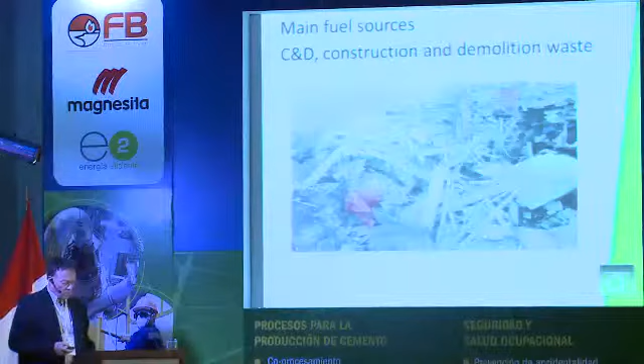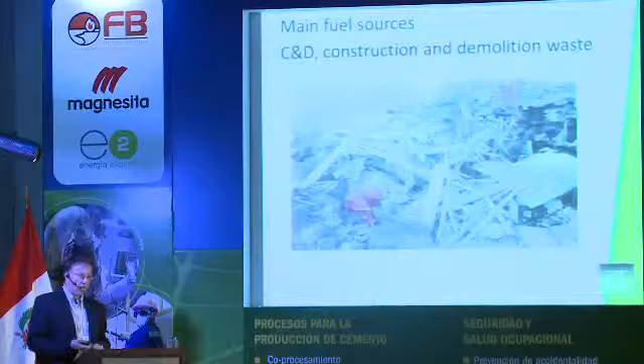The presentation itself: what waste streams are available? One of the major waste streams, at least in North America, is construction and demolition waste. It is mostly directly from the construction sites, not sorted. It contains wood, shingles, concrete. It is very abrasive, has a large variety in density, and at the end, it has little BTU value because the content in wood is extremely high, and wood has, compared to other alternative fuels, a low BTU value.

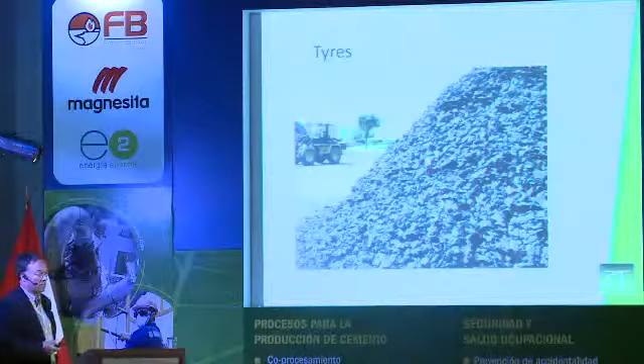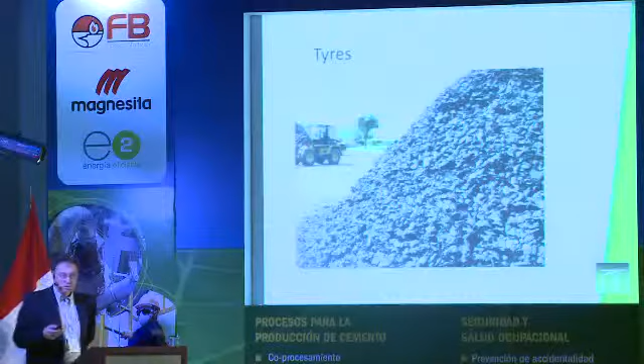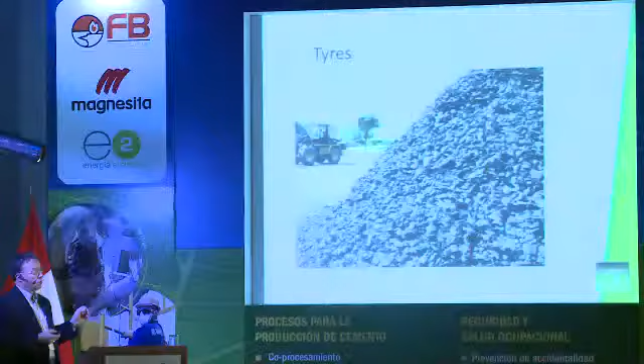Another very popular fuel is tires. Tires, in this case, are chipped. The chipping of tires is a costly process, and there seems to be a tendency in the cement industry to use tires whole, to avoid the process of shredding. Tires are extremely abrasive to shred, so good for manufacturers like us—we can sell big machines and a lot of spare parts—but for you, as the users of this fuel, you're only interested in the calorific value, and the shredding does not really add to that. So tires are expensive to process. Also, tires are limited. Every country has a certain number of tires per inhabitant, and those numbers are very stable, so you cannot assume that tire consumption goes up.

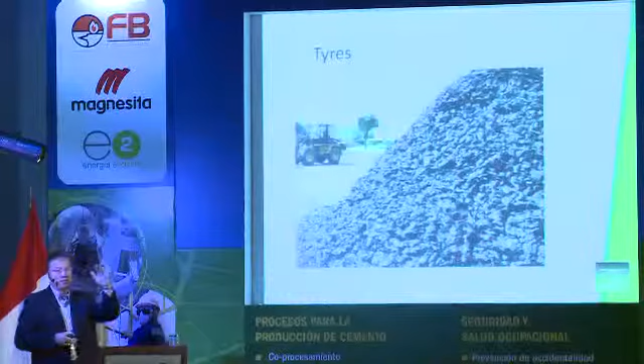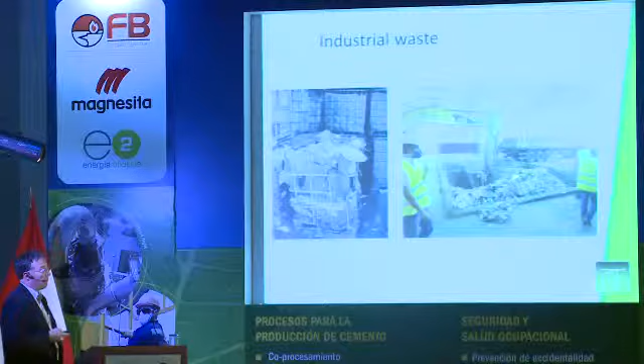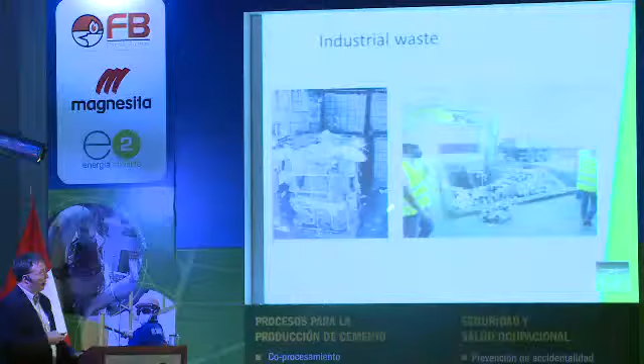But industrial waste is limited. It is a beautiful fuel, but I call it the icing on the cake. You have to remember that every big industry, every big car manufacturer, every big carpet manufacturer, every paper manufacturer, they are producing a product, not producing waste. So their focus will be to minimize the waste. It is very difficult for a cement plant to start a project on alternative fuels based on industrial waste only. If you're really able to find one supplier that can give you 30 or 40,000 tons of industrial waste a year, you're in a very, very lucky spot.

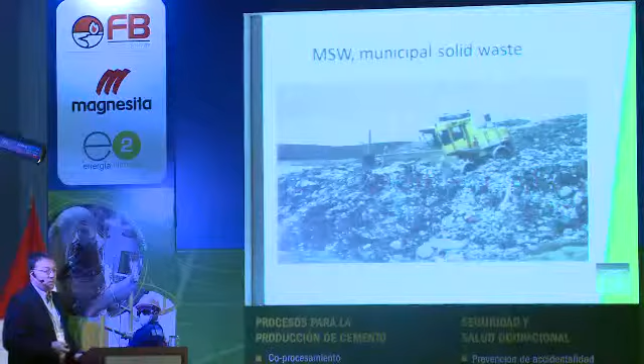So you all know what the next slide is. I present the winner: the winner is municipal solid waste. Why? Because it is unlimited and it is everywhere.

Municipal solid waste is a problem for a lot of communities, as they do have an existing waste collection system, but they only have one landfill, or very large cities like Lima, maybe two or three landfills. But those landfills have a certain expectancy for the lifespan. Once you fill up your landfill, it is extremely difficult to find a new location and a new permit for another one. So the municipalities or the private owners of landfills become more and more aware that their business model is looking at a certain end. It's a cul-de-sac that may be 10, 15, or 20 years, but you pretty much know if I continue to put so many tons into this hole, in so many years I'm going to be full—that's the end of that landfill. Mexico City, for example, is starting to go into mining into landfills because of this problem.

So municipal waste is, in our opinion, a huge resource. In many cases, the waste that goes into the landfill, even after the valuables like metals or special plastics have been taken out manually or automatically, 20%, 25% of the material going into the landfill is good fuel for the cement industry.

Now, we have been talking about waste, but waste is not what you want. You want fuel. So how do we get from waste to fuel, and what's the difference between fuel and waste? Waste is basically all material stream coming in.

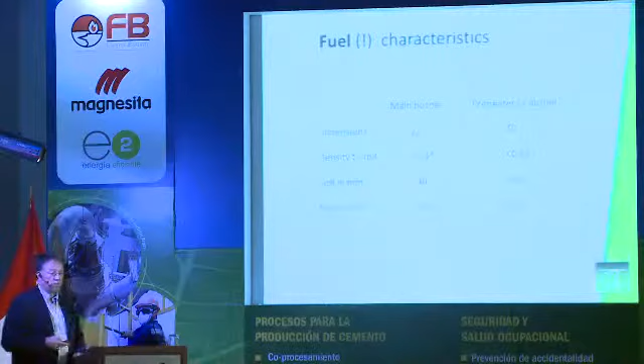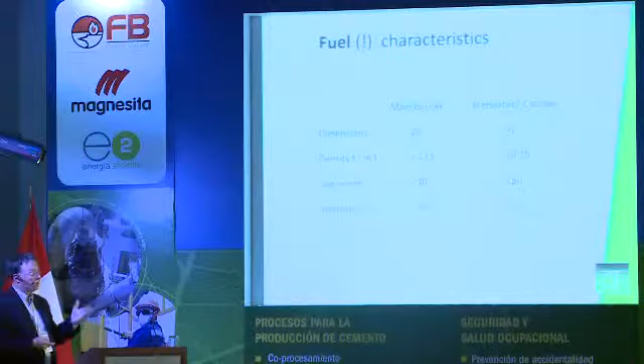For the fuel, we have 2 main classes, and this is not final, this is like an orientation. In general, you have the main burner fuel, sometimes called a king class fuel, where you have 2-dimensional material, very low density, a size limitation, and moisture content, I'm saying 20%, if it's lower, it's better. For the preheater and calciner, the scenario is a little different. You have 3-dimensional material, for example biomass would fall into this. You have much more tolerance on the density, and, very important, your sizing can be, depending on your retention time in the calciner or preheater tower, 80 millimeters or more if you have light material.

Moisture content, again here, this is a general number. In general, the drier the better. The problem is, very often you cannot get dry material. So the problem here is not the water itself, the problem is that the water replaces cement capacity.

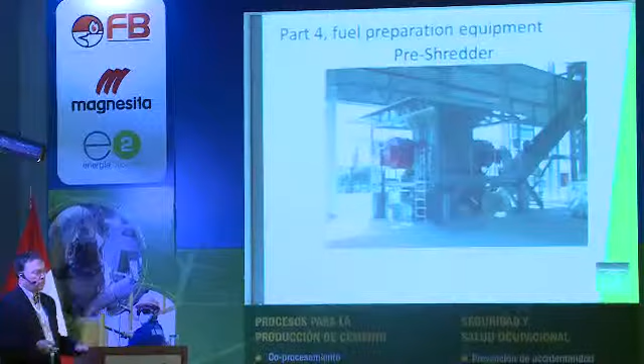First step, since the material comes in various forms, we have a pre-shredder. The pre-shredder is a very, very rough machine which has a configuration basically to take any size material and bring it down to 300 or below 300 millimeters. This is all this machine does, just to enable a more homogeneous flow into the production.

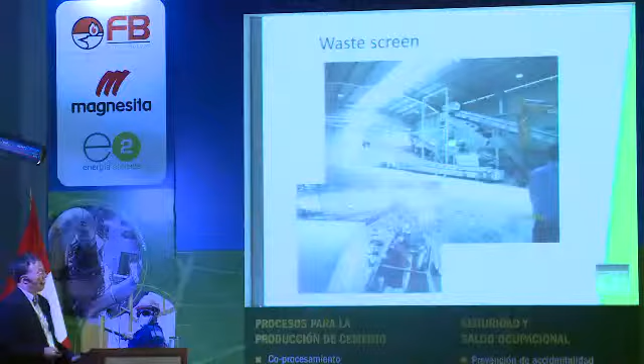Next point is specifically for municipal waste. Here we have a waste screen. At this point, we are separating the organic and small inerts from all the other waste. If you do not have organics in your material flow, you can use mechanical separation. Usually you have this one first, then you may have an optional manual picking to get out the valuables. But if you have organics in your stream, you need to take those out because that is definitely something you don't want in your fuel.

It is important to consider this because if you look at a pie chart from typical municipal waste, about 50% are organics. So if you look at a huge production line, let's say 60 tons an hour, you will look at 30 tons an hour of organics. So you have to deal with that.

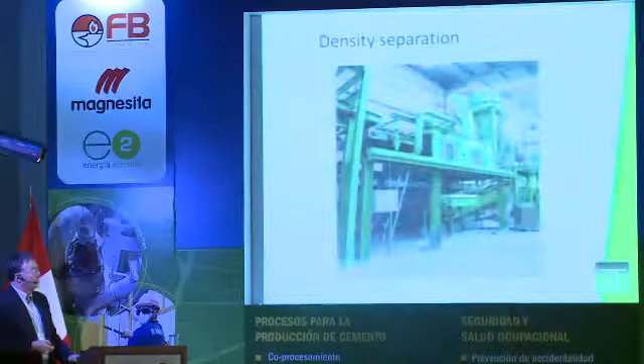The second point would be a density separation. You remember a couple slides back, we talked about the density. The screening and the picking usually only goes for large pieces. But what do you do if you have a small piece of shoe or a small cap of a pencil in your fuel? Or you have a stainless steel piece from a modern Hewlett-Packard or other printer? All of that is in your waste stream. This we're taking out with a density separation, which is basically a complex form of an air knife.

You will generate two streams. One is the heavy parts, for example everything that is more heavy than 0.25, if you're looking at the back end of your production, or everything heavier than 0.15 if you look for main burner fuel. And the light fraction, the remaining plastics, textiles, paper, cardboard, all of this material goes into the fuel stream, and this is fuel quality material.

But we have another criteria. We not only have the density, we also have the size to guarantee a good combustion process.

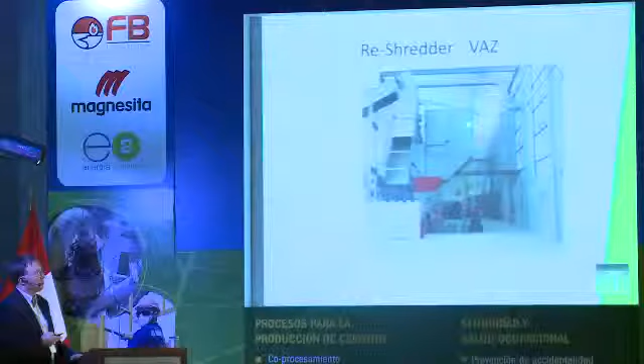So we have a second shredding step. For this machine, you can have various options depending on the size of the project and the throughput you need by hour. In this case, we have a machine with a hopper, which can take material here from the production, but which also has the opportunity to take clean material, which you may buy in very small quantities. For example, if you have a paper factory close by, you may be able to buy 5 or 10 tons a day of clean paper waste, which comes already in bales. So you don't have to pre-shred it, you don't have to screen it, you don't have to use density separation because you know what's in that bale.

So those bales you could introduce into this reshredder at this point, bypassing all the other equipment.

This machine runs on a mechanical base. It's a slow rotating rotor. You have a pusher that forces the material into the stream.

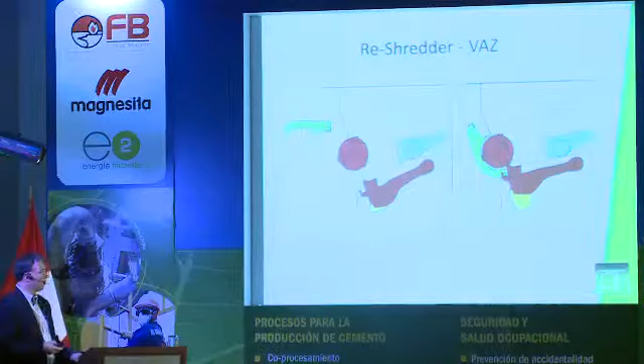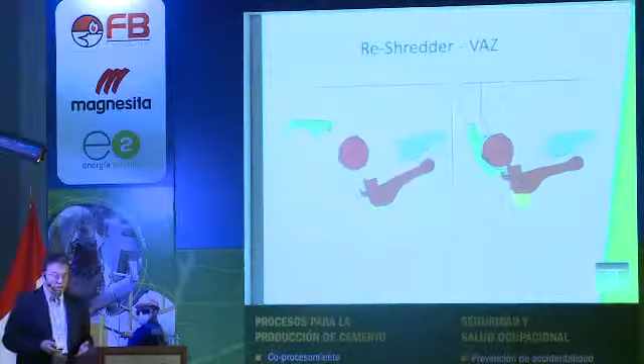And since we're talking waste, we have an air spring counter knife, because with waste, the question is not if you will have a crash, only when you will have a crash. You can have as many density separations and ferrous separations upstream, something will pass through. And if it's only your own mechanic who leaves one of his big Allen wrenches on the belt, when you start it, it will hit your machine.

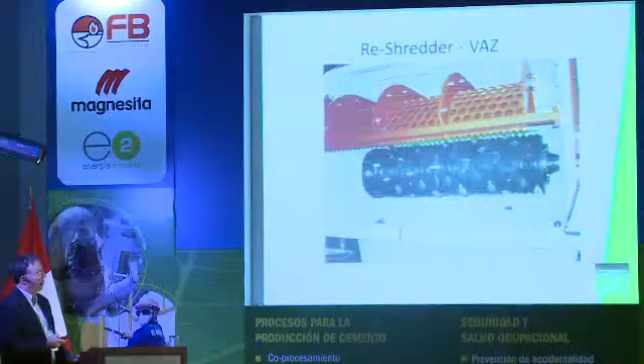So this is why these machines are designed to have relatively small particle size. This is where we define 50 millimeters, 80 millimeters, or 30, 25 millimeters, depending on your process requirements.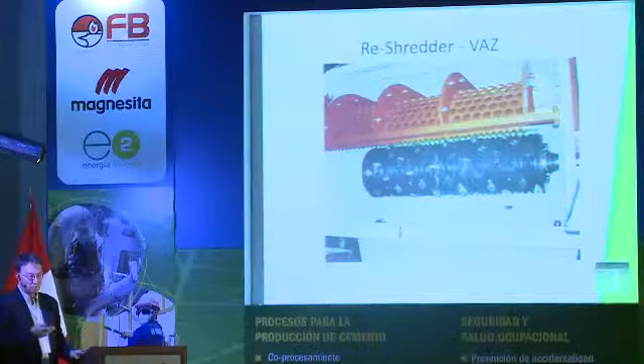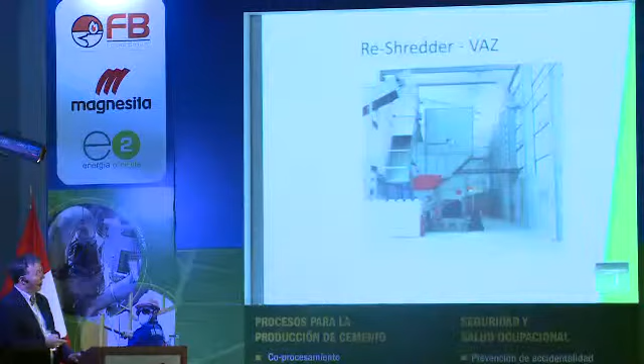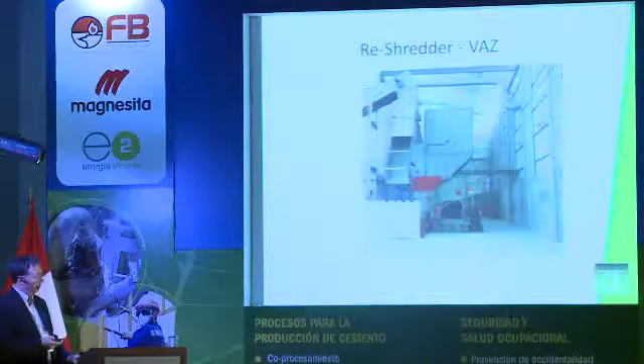You can see the counter knife here is accessible because if you imagine running this at, let's say, 10 tons an hour, you have a lot of material in here. When the machine stops because you have a crash, you will want to be able to access the machine from here in order to minimize your downtime. You will not take your personnel, put that in the hopper, and empty the hopper 10 cubic meters to get to the point of the contamination. You want to be able to do it from the underside. So here you're looking at 15 minutes and you're back in production.

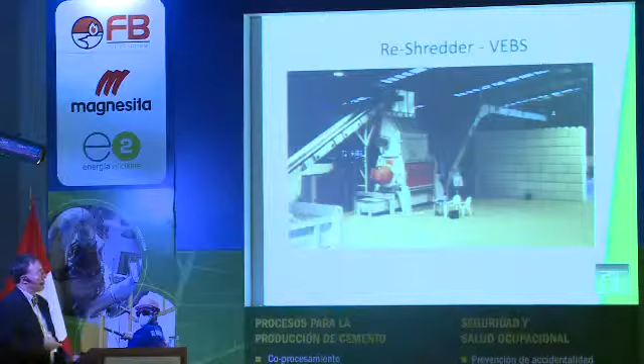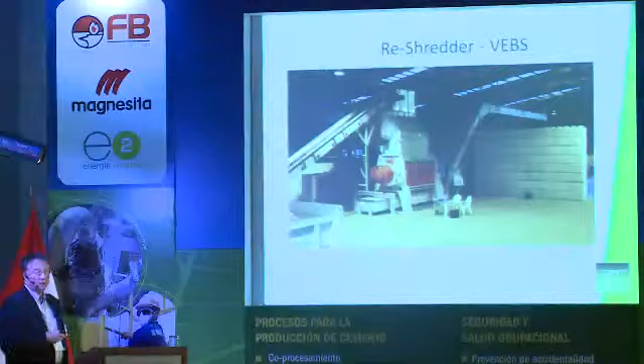Another form of reshredder for higher volumes, up to 20 tons an hour, would be a machine which we call VEBS. This machine is only suitable for continuous feeding. So the equipment on this side, on the upstream side, has larger volumes. And although you have larger capacity in processing, you have the disadvantage of not being able to insert additional clean material, industrial waste, into this machine. Slightly different applications, same product.

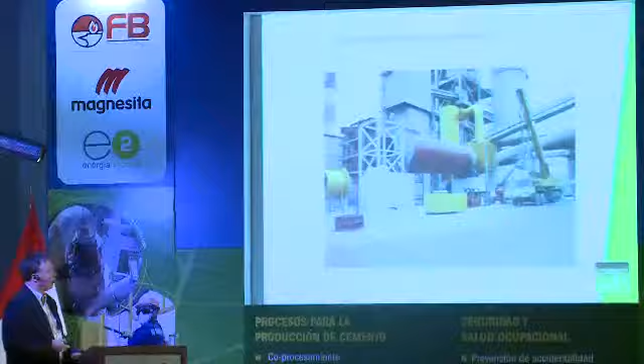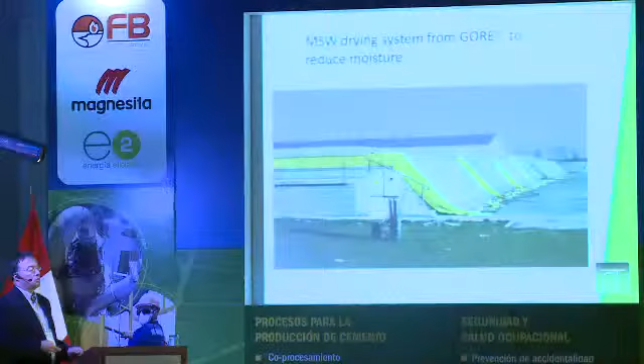One little excursion, we spoke about moisture. It is difficult to get the moisture down consistently, so there are generally two approaches. You have continuous drying, which can be installed in the cement plant, where the energy to dry is usually available from flue gases, so no extra operational costs. The other option is to work in a batch system, usually already at the landfill or at the processing company, where the material stays for several days, and the organic matter in the material creates the heat required for the drying. So in this case, you just need some small ventilation systems.

Another point in the production is the sampling. It is important to take representative samples, and it is important to be able to take samples 24/7, and to have those samples taken automatically because, at least in Europe, we have this infected needle scenario, and because of that it is illegal to have an employee go into the material and take a grab sample. You never know what's in there, and you want to protect your employee and eventually your company from those risks.

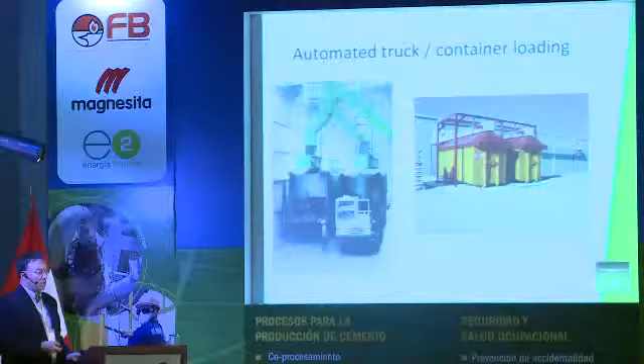Final step, when you're all done, you have your product, and there's basically no more added value. So at this point, you have to decide how to get it to the customer. If you're the landfill operator or a joint venture, usually there is transportation. Transportation costs are extremely important in the overall economic calculation of such a project, which is why we recommend a highly automated system where no more personnel is involved. People equalizing the fill levels of containers, there's zero value. You have to be able to get those in a continuous flow.

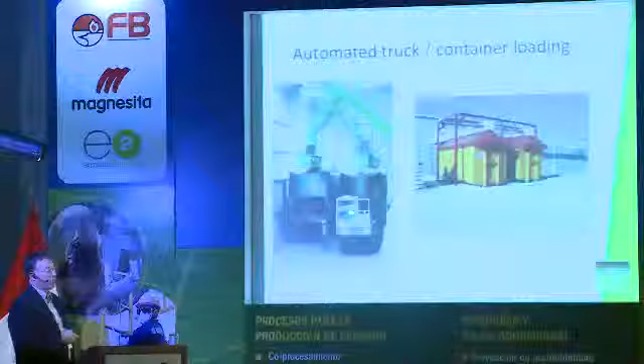And if you talk about serious productions, 8 tons or 20 tons an hour, you will have one of these every hour. So there must be a certain way to maintain your production running. The volumes are important here.

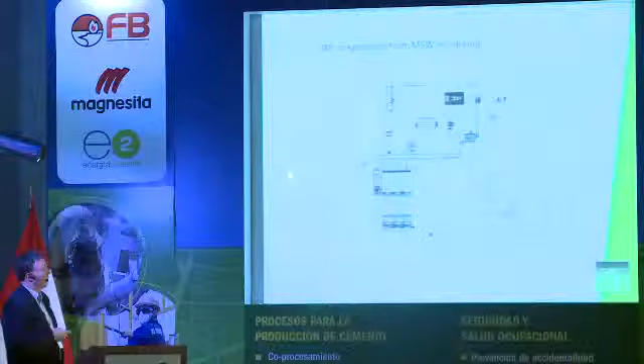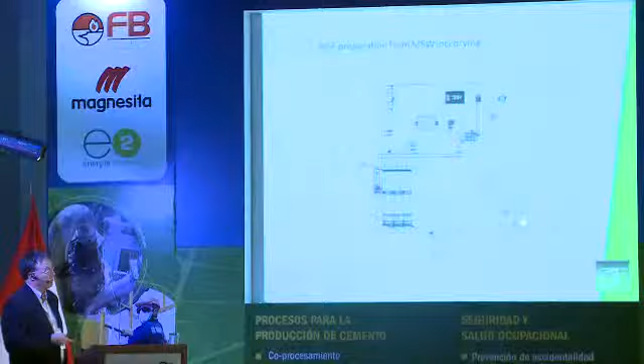Case study. This is just a drawing to show you how these systems can be really complex. We have a production here, a complete drying system, and after the drying, we have the reshredding and the on-site storage. From the on-site storage, you can go to the cement factory. And there's a small area here which has a baling unit to bale valuable materials.

I'm a little bit running out of time.

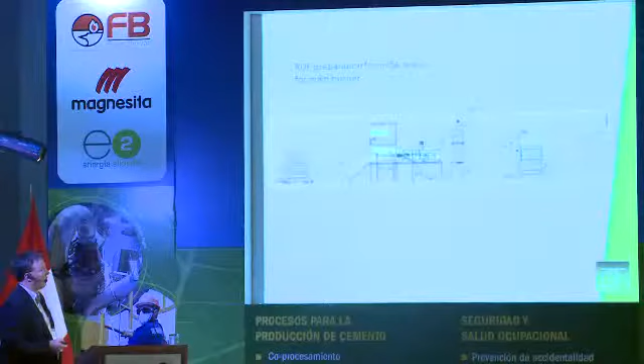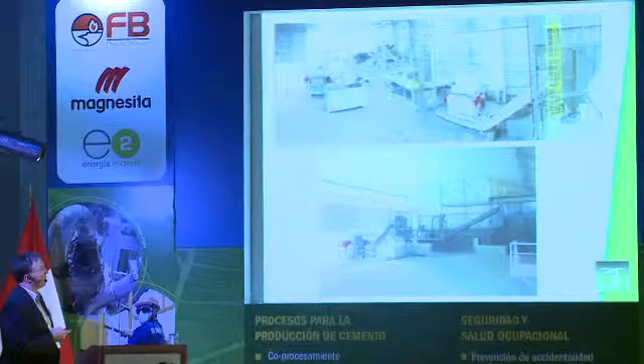A simple system for main burner fuel production. You see the main elements: pre-shredder, ferrous separation, density separation, and the reshredding. And this is what these systems would look like in reality: pre-shredding, screening, ferrous separation, reshredding, and then you go into a storage or into the truck.